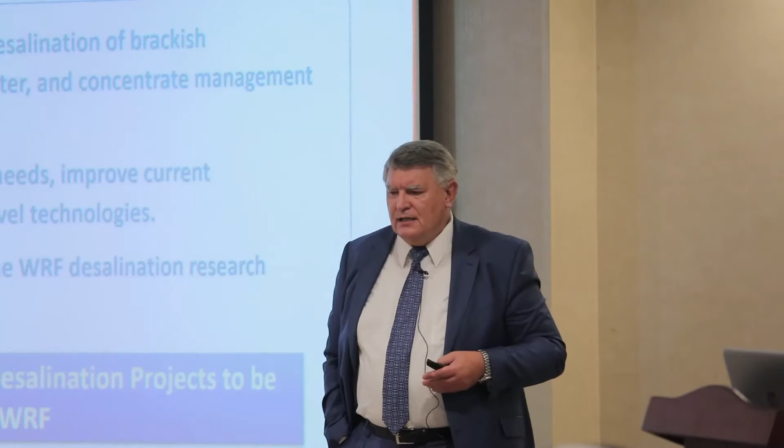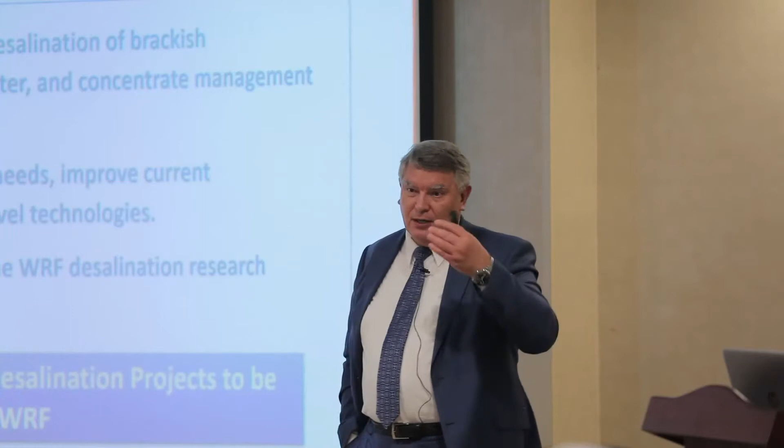What we're trying to do is identify timely and compelling research needs—what is needed by the industry to address those sources of water and produce them at lower, competitive pricing. At this point, the focus is research for the next 2 to 3 years. Today, the research community in the US is advancing topics in science very quickly, so every 3 years the focus sometimes changes. There are some common themes, but every 2 to 3 years it needs to be updated because new topics come up as research and science develop, and they have to be incorporated. Science in desalination is growing and changing fast, so every 2 to 3 years is a good time for updates.

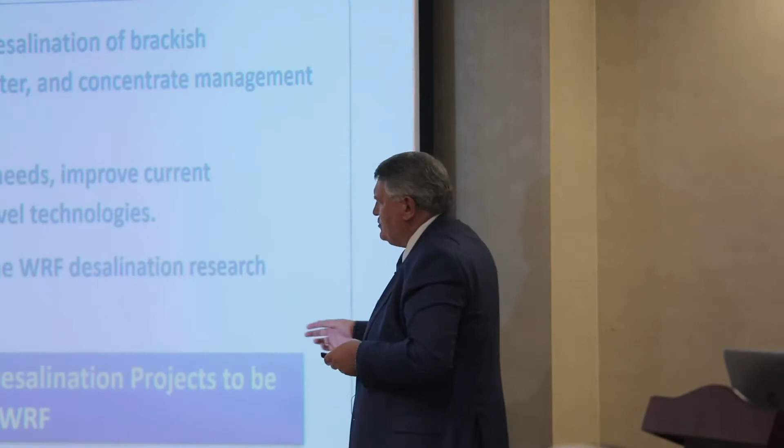So the purpose of the roadmap is to prioritize and identify projects that are of high value to the Water Research Foundation subscribers, to public utilities, to research institutes, and to private sectors. I'd like to present to you the process—how they developed it, and how they're currently developing it, since it's not done yet. Let me explain the key steps they took.

First, they created a steering committee to oversee the research needs, made up of experts in the desalination field—I can proudly say I'm one of the members. There are 5 members on that committee, and its purpose is to steer the direction of development of the roadmap.

One of the things we did, because most people on the research committee are very busy and don't have time to write lengthy roadmap documents, is retain a consultant through a procurement process to do much of the work associated with writing, preparing for workshops, and other activities. That consultant is an engineering consulting company in the US, selected through procurement. We prepared a request for proposal, submitted it to everyone interested, had 5 companies submit proposals, and based on their scope, proposal, and costs, we selected one of them. So one purpose of the steering committee is to make that selection.

So, having created the steering committee and procured a consultant, the very first thing the consultant had to develop is what we call the State of Desalination Science Report. This gives an overview of all key issues at present—both in science, but also in policy, permitting, and environmental impacts. We look at it very holistically. This report facilitates the next step, which is a workshop that identifies the actual key topics of research.

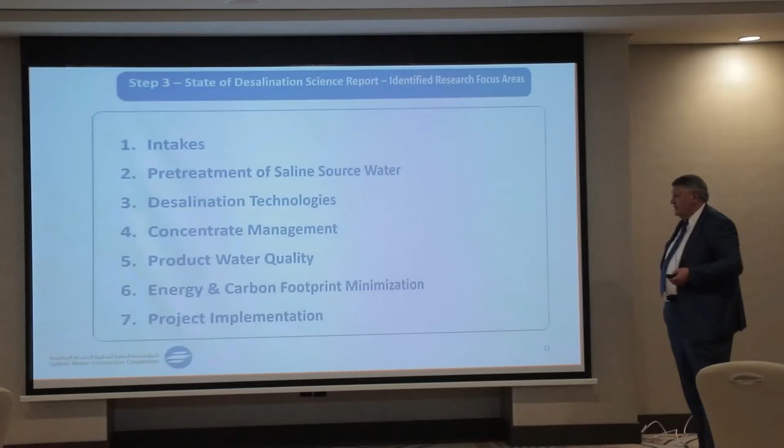So what are the issues associated with intakes in the US? In the US, we consider, and many of our regulations consider, intakes as damaging to the species that live in the water by two processes: impingement, which means pressing the species against the screens of our intakes so they die or get injured from that pressing, and entrainment, which is once marine organisms enter our water, they go into pretreatment and other facilities and basically get killed. Those types of losses by impingement and entrainment are considered significant in the States now.

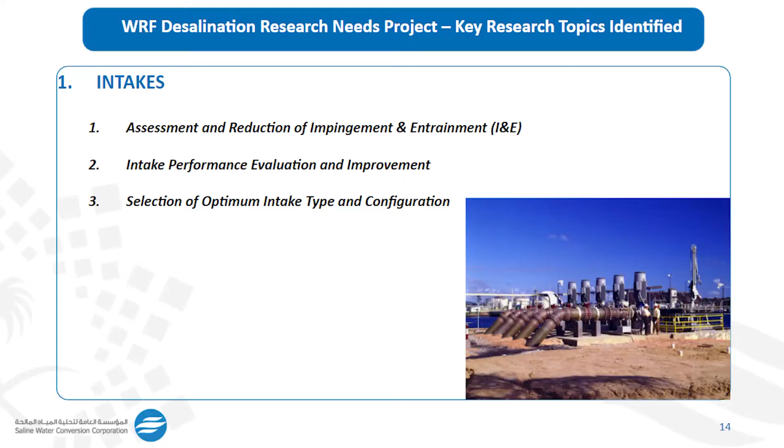It depends on where the intake is, and there are regulations to minimize or compensate for that. For example, the Carlsbad Desalination Project, where I was chief technology officer, was required - because of the amount of marine organisms taken from the water - to create a separate lagoon that produces exactly the same biomass of marine organisms that would be taken by the intake. Very expensive to do; it added about 20% to the cost of the project, but that's how the US looks at it. So anything that minimizes impingement and entrainment significantly reduces the cost of the project in the States. That's why it's so important.

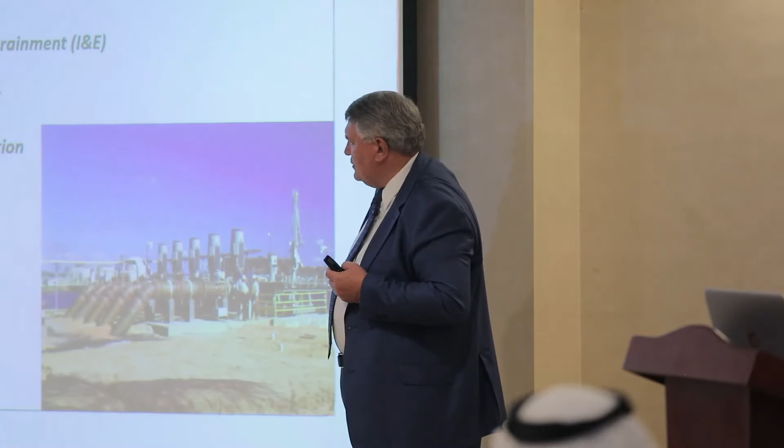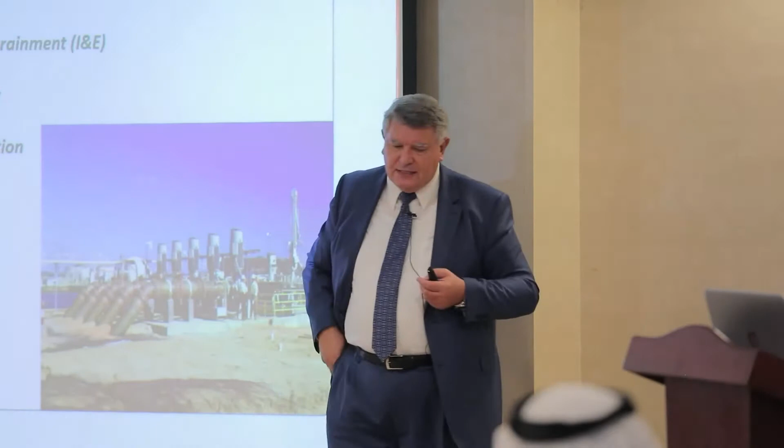Next is intake performance evaluation and improvement, which is also related to impact on the environment. And then selection of optimum intake type and configuration. In the States, as I've seen in a number of studies done in Saudi Arabia, there is a big discussion about whether to go with open intakes or subsurface intakes of various kinds, and which one is better for what conditions. Subsurface intakes ultimately minimize environmental impacts because they don't impinge and entrain marine organisms. So selecting the type of intake for specific conditions is one of the key topics people are interested in in the States.

The other key topic is pretreatment - fundamental understanding of foulants and fouling mechanisms. Despite the fact we've studied fouling for many years, and many of you have probably been involved in studying that.

Dr. Al-Amoudi has worked on that for many of his research activities. Fouling and understanding fouling is of critical importance.

Now the thinking is changing. It used to be that we add chlorine and eventually win the fight against bugs by killing them. One thing we've learned over the years is you can't really win that game. Marine organisms are very resilient to chlorination and many other methods of destruction. Most of the biofouling organisms are called alpha proteobacteria. They were the very first living creatures on this earth, exposed to extreme conditions like ultraviolet irradiation that don't exist today, but they adapted. So they're very difficult to destroy.

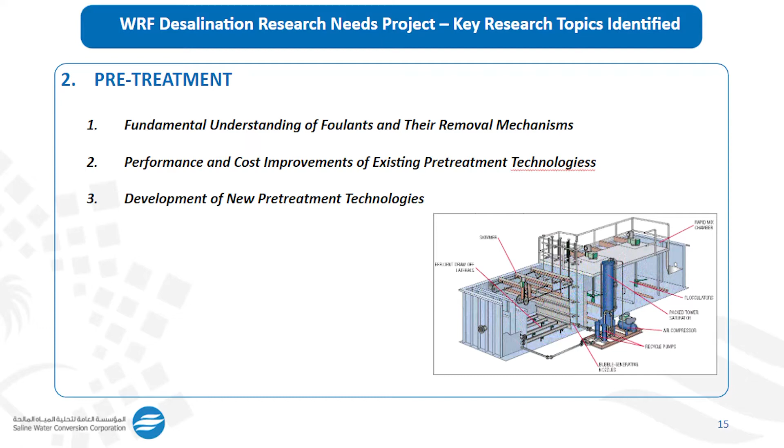So what we're doing now is saying, forget about killing them. Let's figure out how to make them work for us, by removing the organics upstream using bioreactors, like activated sludge, or by shutting down their fat gene. There was interesting research from one of the team leaders I'll talk about, who figured out there's a particular gene in bacteria that creates the sticky substances around them, and there's a way genetically, by certain chemicals, to stop that gene from activating. So now we're looking at understanding how bacteria work, not necessarily trying to kill them, but working around to suppress their ability to stick to the membranes.

Number 2 is performance and cost improvements of existing pretreatment technologies. There are many technologies that do not work, like dissolved air flotation, which has been built in many plants. None of the DAF systems ever worked well. I actually did a study for a client in the United Arab Emirates to check how they work and how much they remove. They're a complete failure, but we keep on building them, and there are very good reasons for that. So there's a lot of research now focused on what's wrong with DAFs for seawater.

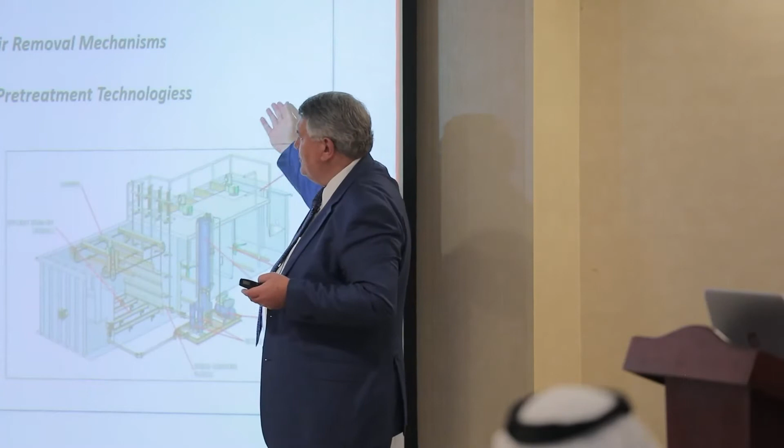There's a lot I could talk about for hours, but it's a very interesting topic. Now we're trying to learn how to improve dissolved air flotation to make it beneficial, or do we really need it, and what are the options? There are various solutions implemented worldwide that actually remove DAFs entirely - just forget about DAF. This used to be good thinking 10 years ago, but it's old thinking now.

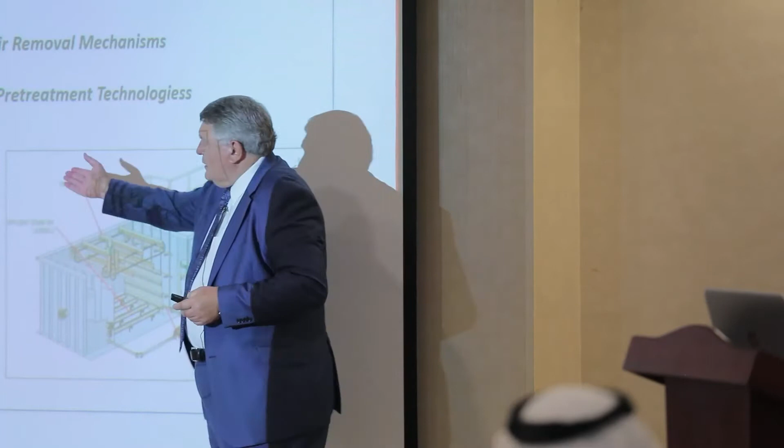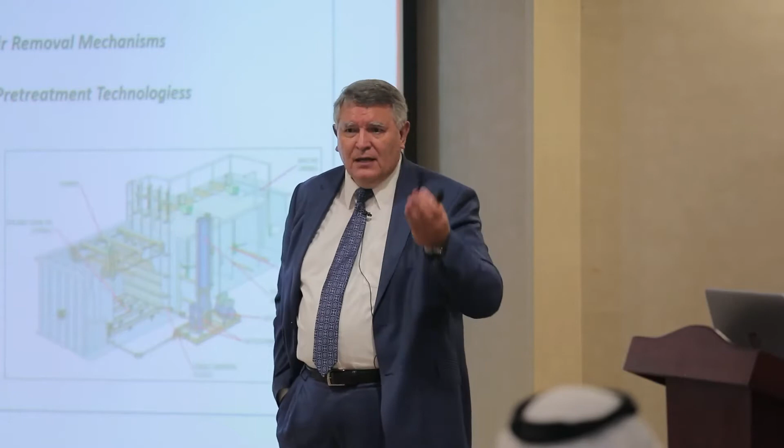Number 3 is development of new pretreatment technologies - ceramic membranes and other methods. One researcher looks at pretreatment and says, we have all this bacteria and organics, why are we trying to remove them? Just kill everybody. The approach is ozonation, which burns bacteria and organics, so there's nothing left to pretreat - nothing that causes any issue because it's all burned through ozonation. Those are the new methods of thinking, not conventional filtration, but more intensified processes the industry is now looking at.

Of course, desalination itself is very critical. We tried to build bigger desalination membranes - 16-inch, 18-inch, 19-inch elements in the States. We failed for a number of reasons, which I could talk about for another 2 hours, but ultimately we concluded this is not the right path - building bigger elements that produce about the same amount of water per square meter. The right direction is to increase the productivity of the membranes themselves, the surface layer. Currently surface layers are created through a random chemical reaction. If we could streamline it and turn the surface of the membranes to look like a honeycomb, we could increase productivity of the same size by about 20 times. That's where the focus is now - new materials, not new big membranes as we used to think in the past.

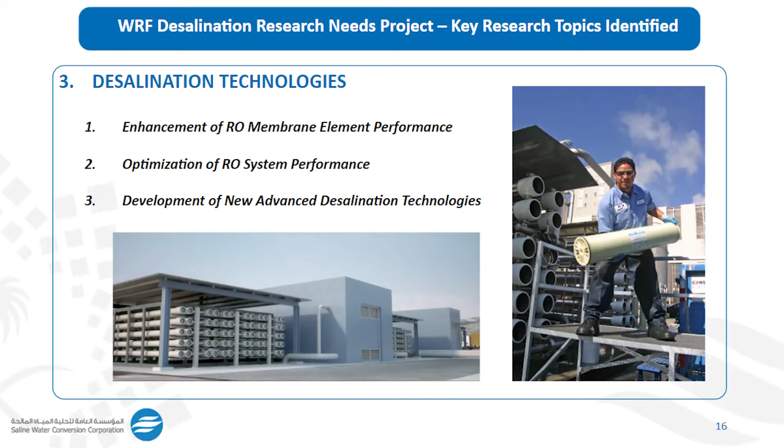So this is about enhancement of RO membrane element performance - that's where the focus is. Also optimization of RO system performance - how can we squeeze more water from the RO system? We know today most of our desal plants are designed around 35 to 45% recovery. The future is in recoveries over 60%, 60, 75 and on. So that's how we develop those systems.

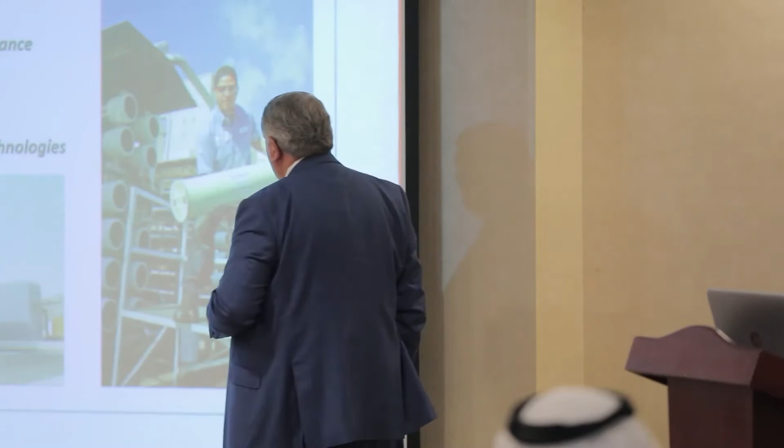And then number 3 is development of advanced desalination technologies that are non-reverse osmosis, like aquaporins and other processes that have been attempted but not yet brought into success. It doesn't mean they don't necessarily work - there's no easy solution, but nature often offers very elegant solutions, like mangrove desalination separation or aquaporin separation, that could be a completely different way of solving the same problem.

Concentrate management is now very, very important. For us to grow desalination business, we have to be able to get rid of the concentrate and not only dispose of it, but also turn it into a valuable product.

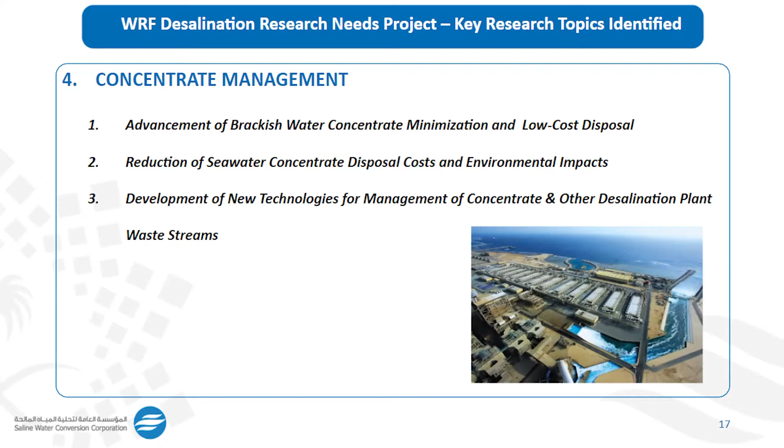So we have focused on advancing brackish water concentrate minimization and low-cost disposal. Currently what we do in inland areas, we just dump it in very deep confined aquifers where the brine cannot exit. Or if the project is relatively small in volume, we use evaporation ponds. Both of those methods are very expensive, and we have not considered those elegant solutions.

So now we're looking at zero liquid discharge approaches, which could minimize significantly the volume of brine, reducing seawater concentrate disposal costs and environmental impacts. And then development of technologies for management of concentrate and other waste streams. Why are those important? For the same reason I mentioned previously: how do we turn brine from waste into a valuable product? Technologies are evolving to the point where we could actually do that nowadays.

Product water quality is also a very important issue in the US. One thing we realize is product water quality has direct impact on human health. And that's why what we're trying to understand is, for example, desalinated water has less minerals than other sources of water. How is that impacting human health? We find that there are actually negative impacts. We've seen that actually happening here.

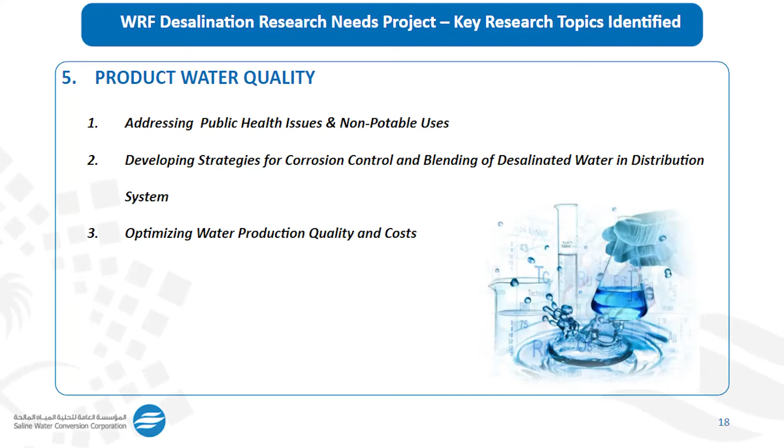I participated 2 years ago in a research project in Qatar that actually found, medical research found, a statistical correlation between cancer and low salinity desalinated water. And that is going to continue for 5 years, with hopefully next year's research. It's actually led by the Queen of Qatar because she considered that a very important issue. So those types of issues we start finding as well in the States. So desalinated water is not necessarily healthy water if it's not nutrient balanced.

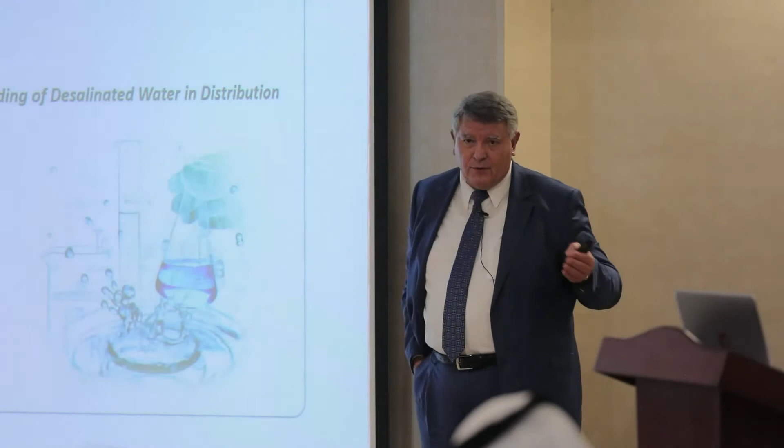Developing strategies for corrosion control and blending of desalinated water with other systems. We find that when we start blending desalinated water with other sources like river, lake water, and other water, we start seeing chemistry that we haven't seen before. And we're learning to understand what happens when we mix it.

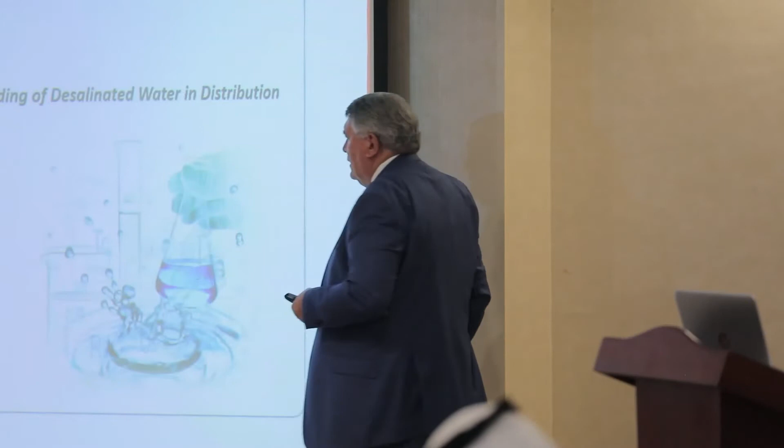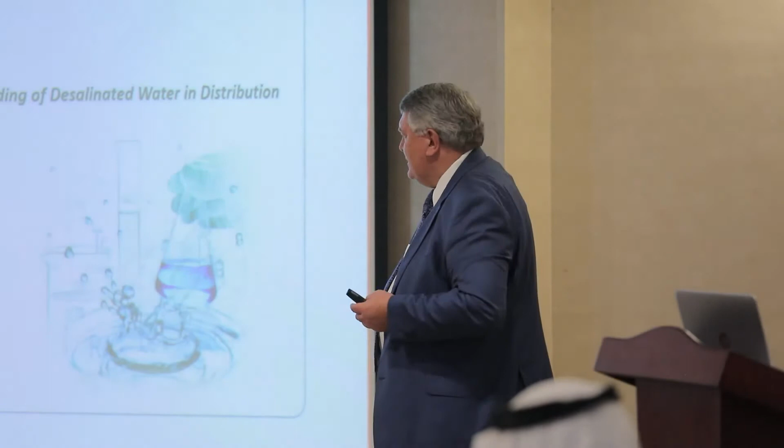And then optimizing water quality and costs. We can obviously produce what we call in the States designer water. We could add minerals of any type to make it look like Perrier, Pellegrino, anything, you name it. But that costs a lot. So where do we find the optimum between remineralization and quality that is at a reasonable price? And carbon footprint is certainly very important now.

Development of RO energy reduction technologies, from energy recovery, to switching some of the components of the desalination plant to work on solar panels. Nowadays, most of the new designs have all roofs of the desalination buildings covered with solar panels. Not that that makes a huge difference, just to tell you, based on our experience, if you cover all the roofs of all the desalination buildings, you'll get probably about 1% of the demand of the plant. So it's not huge, but it works.

Second, advancement of energy recovery technologies - we're trying to squeeze more energy out of the brine. And third, development of new low-energy desalination technologies, looking at how do we desalinate water without using reverse osmosis, because that is a very expensive process. Aquaporin is an excellent example of that, for which the discoverer of that process received a Nobel Prize, where he found that besides reverse osmosis, there is enzymatic transfer of water through membrane cells. And that enzymatic transfer is a very low energy transfer, 100 times lower than osmosis. So how do we harvest that?

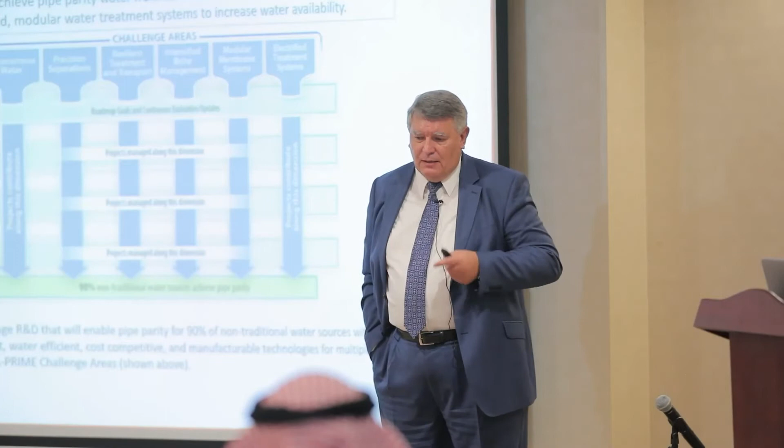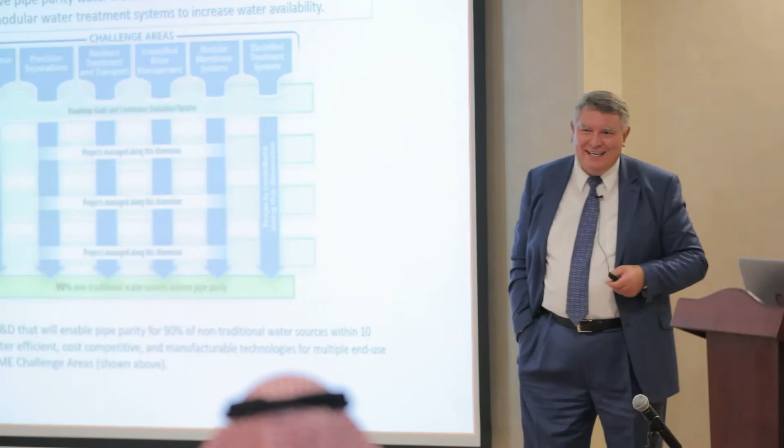We're already running a pilot - we made a joint venture with them. We're running a pilot in Norway of the plant, it's been running for 3 months, and it's coming to Jubail next March, so you'll be able to see it. Hopefully next time when we have a workshop, we'll take you out to be able to see it. So that type of resiliency is very important.

Intensified brine management - what that means is exactly what we discussed, turning brine from a waste into a valuable product. What do we do to do that, and do that inexpensively?

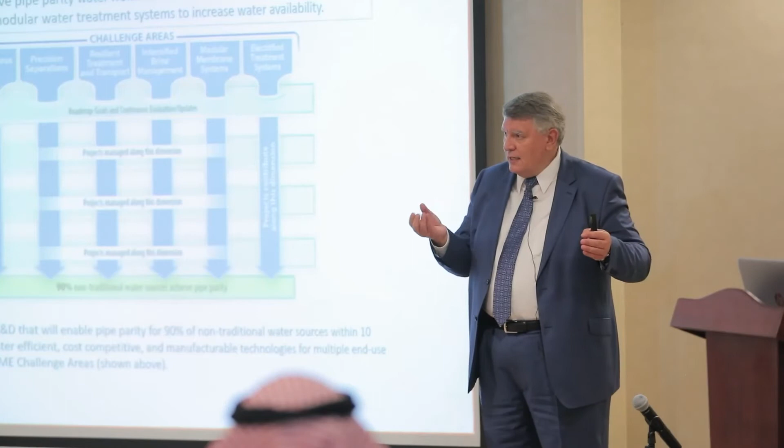Modular membrane systems - that's a very important new concept considered the future of desalination. The way US research institutions see desalination plants in the future is as two bags of chips, low pressure and high pressure chips coming to the desalination plant. Every component of the plant is made of plastic except for the motors, and every component is printed on site with 3D printers. So the vision for the future is to develop a desalination plant that's at least 80% plastic, all printed on site using 3D printers, differing only in chemistry between low pressure and high pressure piping and equipment.

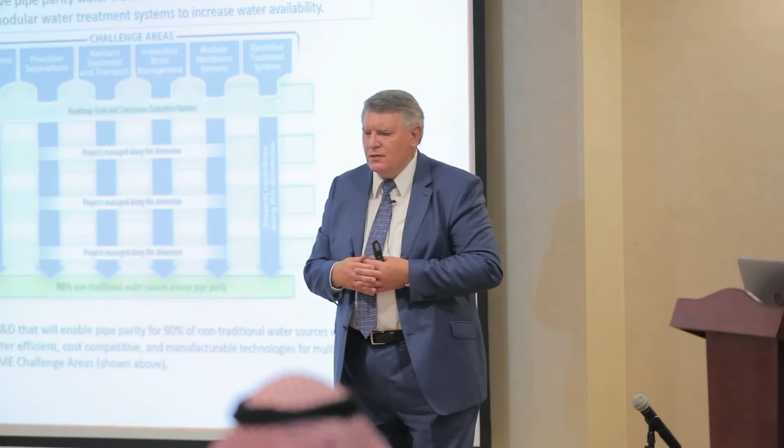And the way they see desalination in the future is responsive, and it will be morally obsolete - obsolete even in 10 years from now. So we have to look at how we can regenerate the plant quickly to match new technology.

The way they see it is we build most components from plastic, and once, let's say, this pump is morally obsolete 3 years later and there's a much better, more efficient pump, we take this pump and grind it into chips. If it was a high pressure pump, high pressure chips; low pressure pump, low pressure chips. Those chips are then used to print a new pump. So technically everything is 100% recyclable - that's the vision of the future.

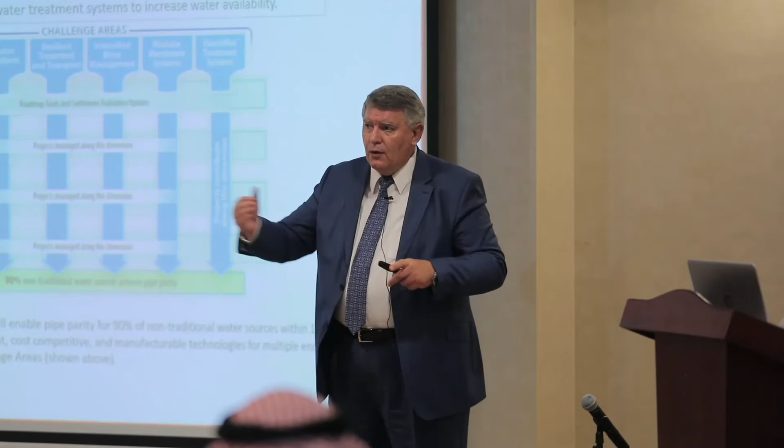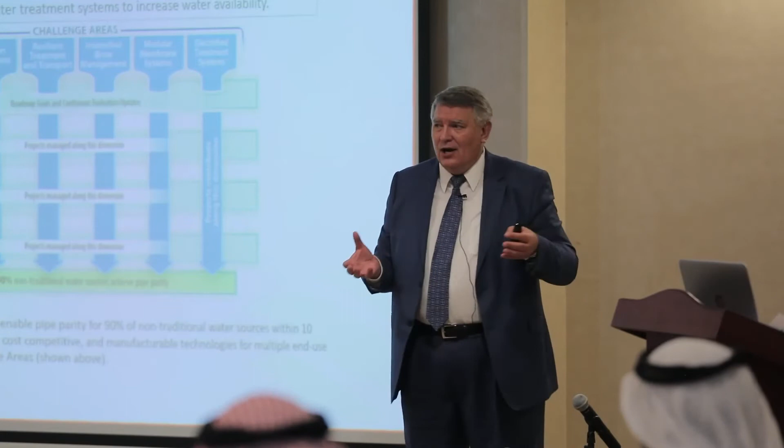All the components are recyclable, and what you get on site is no longer transportation with huge carbon footprints from moving pumps, equipment and heavy machinery - everything is printed on site through 3D printing. That's why this research is putting huge effort and funds into 3D printing every component we can think of for a desalination plant, because they believe in engaging the industry to rethink how to make everything modular enough to be easily 3D printed on site from plastic material, and then recycled, more importantly. Once it's morally obsolete 3 years later, you're a subscriber to, let's say, Torishima, which supplies you pumps.

You're a subscriber to them.

Three years later, when they have a new pump, they send you over the internet the programming for the 3D printing of your new model pump. So there is no pump being moved from Japan or any other location where it's produced. It's all printed on site. All they send you is the software to print the new part at the facility. That is the vision. That eliminates the huge carbon footprint of transportation of equipment.

It also eliminates a big issue. One of the items brought up in our roadmap here in Saudi is spare parts. Often we rely heavily on outside production, outside equipment, and getting spare parts sometimes takes 6 to 8 months. That's my experience with SWCC, for example. Everybody else is the same way.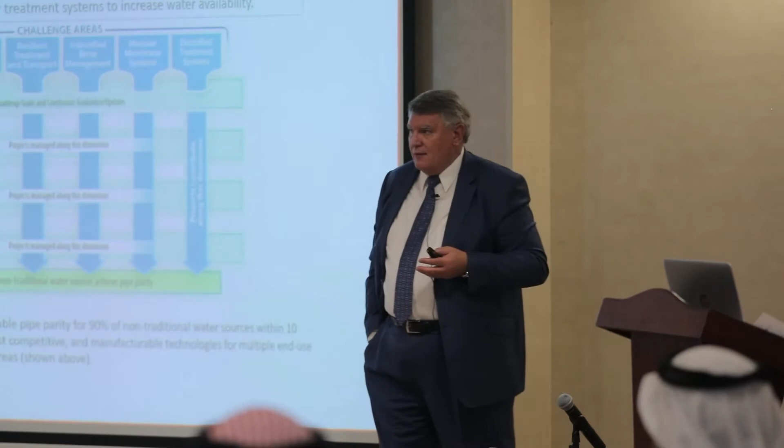Yeah, this is important. Asahi, for example, now they come up with pipelines from resin, organic resins. Now we have this in our piping plant. No more stainless steel for piping. No need for high alloys. Only organic resin now, succeeded in our piping plant when we tried.

Now this is a ship. This was a dream, but now it's a ship. What's the name? Asahi Kasei is the name of the Japanese company. Now for this team, what they are looking for is promising for us. Yeah, Asahi developed the high pressure piping, for example, and it's logical to assume it's possible.

As all of us familiar with reverse osmosis systems know, Asahi is a producer of vessels. They say, okay, we can make a vessel for high pressure. So what is a vessel? It's a pipe. So why can't we just make a pipe and replace all the steel with plastic? And that's what they're doing.

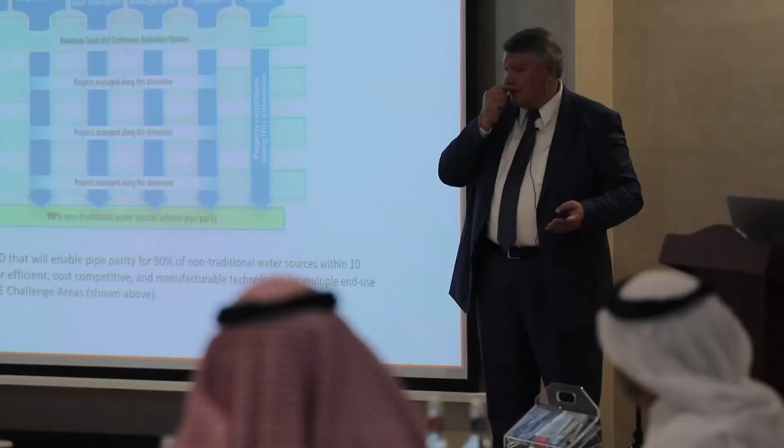The US is looking exactly the same way. Everything that is steel has to be replaced because ultimately steel is very difficult to recover and reuse, while plastic can be recovered and reused. And even if it breaks 3 or 5 years later, who cares? We'll just print another one. So 3D printing is at the core, and they call it advanced manufacturing.

The same thing applies for sensors. Sensors are no longer purchased from company A, B, or C. They're actually 3D printed on site as well. That's the other direction of thinking for these technologies. So modularity will be very critical, because we want to be able to change things easily, like Lego blocks. We've seen this in New Mexico, at Sandia Lab, where they have a 3D printer. They've developed sensors, and we're going to work with them on that.

These are 3D printed sensors, simple sensors, which can be installed either in the water or attached to the outside of a pipe, like a strap-on flow meter—they can strap it onto the pipe and take a reading. They don't require much, they're only $10, and they can be printed. So let's say 6 months later, rather than calibrating, you just print another one. That way there's no calibration, no expensive replacement—everything is done on site.

The other thing they developed, which is the new generation of thinking, is moving past fiber optics. Currently we use a central control room that gets information from all the sensors, which are usually physical metal sensors. We collect the information, process it, send it back, and use fiber optics. But they say fiber optics is stuff of the past—we shouldn't be looking at fiber optics anymore.

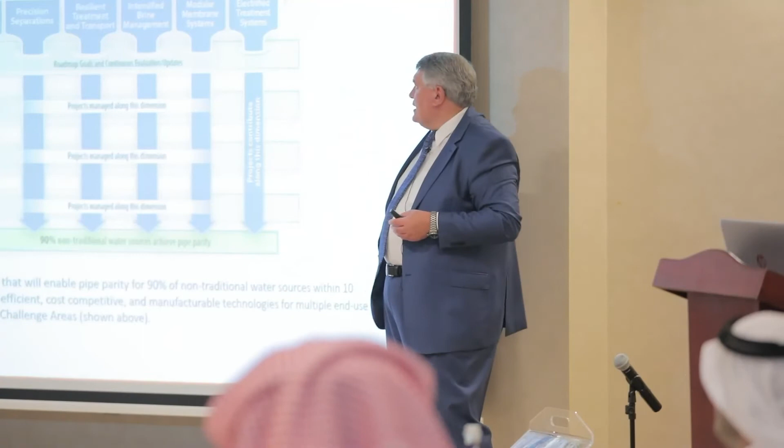The thinking here is they develop sensors that can be activated by a signal from the central control room, which sends the signal to activate the sensor to take a reading, and the same energy sent from the control room is enough to return that signal back to the control room. So there is no internet anymore—it's a remote sensing approach. This is the next generation of sensing they're working on, and they consider it part of the modularity and electrification of the system.

How do we eliminate the need for expensive equipment that requires calibration and heavy maintenance? The answer is: let's make it cheap and just replace it. Why do we even have to calibrate it? We just print another one. And they showed us sensors they developed, and 3D printed one in front of us using a simple printer.

They printed a $100 bill as well, and it looked like a real one. And they said, well, you run out of funding? Here it is, it can print anything. But the point is, this sensor is $10.

We're not talking about this 3D printer, we're not talking about expensive equipment. So all this is possible and already done in other industries.

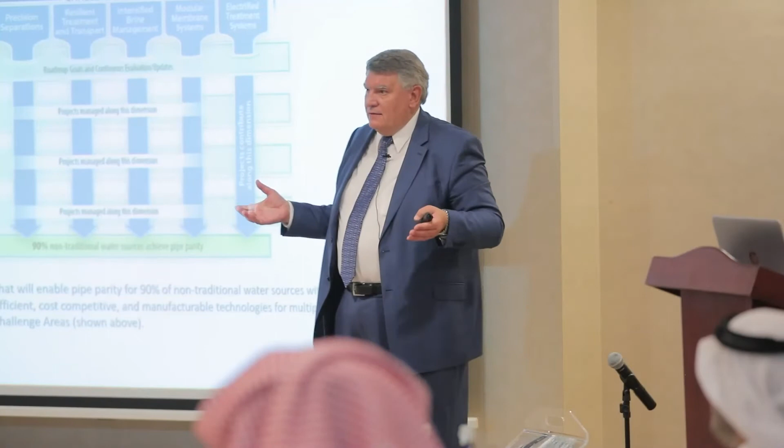When we went to visit Oak Ridge National Lab, you wouldn't believe, Tesla, who you know from the electrical cars, has retained Oak Ridge to develop a 3D printer for their cars. They're 3D printed except for some components, 90% of the Tesla cars are 3D printed. That's how everybody looks at printing in the future. You see Boeing with their new engines, huge complex engines, all 3D printed. So the industry now is retaining those labs to develop 3D printing.

The other beauty of it is they not only can 3D print the component. Let's say we need a spare part, and that spare part will take 6 to 8 weeks normally. It will take about 2 to 3 hours to 3D print. And more importantly, they can figure out exactly what is wearing off and provide a different substance, often a composite material, which could be a mix of plastics and metal, to replace that component. So when they 3D print, they can print it 100% in metal as it was, but they can also offer 3D printing in different composite material that can actually make it more durable.

We've been talking with them. Actually, one of the projects we've been focusing on with Dr. Alamoudi is for them to help us, and they're coming early next year, to identify which components in SWCC plants have the longest lead time. Sometimes we get 6 to 8 months to get a component. Well, we could print it in a couple of hours instead, and they said, sure.

And the high pressure pumps, valves, any component you could think of. The beauty of it is the way it works: it electronically goes into the printer and it prints it, replicates it. So you need the scanner and the printer. That now exists as technology, and we're not talking only about printing a small component. We can print the entire car. The 3D printers for cars are about the size of this room. So the point is, this technology already exists and we have to benefit from it, because that eliminates the spare part issue. We could print anything we want.

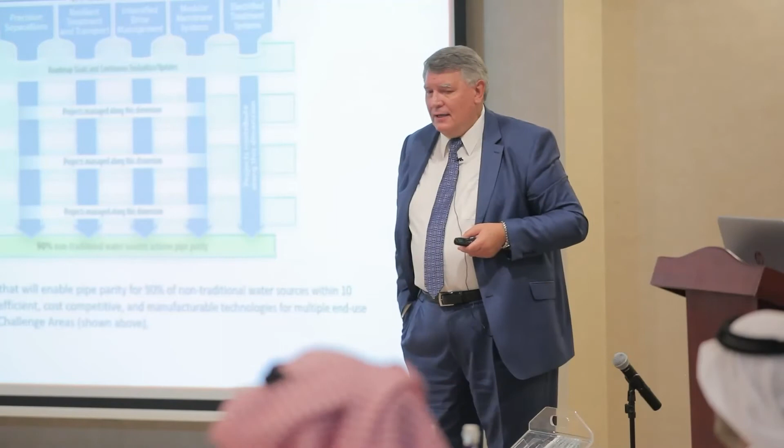Yeah. Yeah, you could print every spare part. Yeah, and that's the vision of the future.

At this point, we will start with one 3D printer, which will be located in our facility. Then, once we prove everything and develop it to a point where everybody's comfortable and we train staff, we'll move one to every treatment plant. So you could print anything you need, you don't have to wait for so many months.

I don't know, maybe about 15.

Okay, and I'm going to go a little bit faster over what's left. Basically, it explains who are the leaders in it, what is the funding available. The leader of the entire program is one of the National Labs, the Lawrence Berkeley Lab, located in California, in San Francisco. They do lead the entire program.

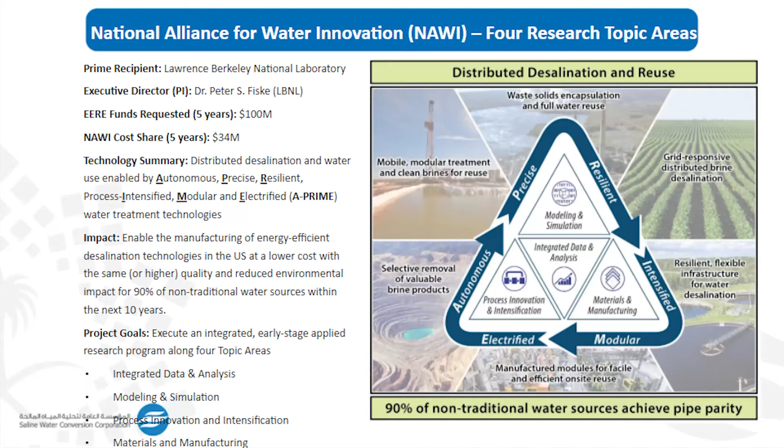And I wanted to talk a little bit more about how the topics are selected, and more importantly also, what are the criteria for project selection. How do you pick, because you have such a big area of projects you could do, what are your criteria to pick a project and to build and implement it?

The criteria are energy intensity, energy per cubic meter of water produced, levelized cost of water, basically we call it cost of water production, and water intensity. This corresponds to what we call recovery. In a desalination plant, as I mentioned, currently we take 100% of water and we recover 30, 35, 40%.

How much higher we get will be an important criterion. So if, for example, a technology can recover 75 or 80% of the water, it will be prioritized compared to a technology that is not as efficient, maybe producing the water at the same cost but with lower recovery. So recovery of the source product is very important.

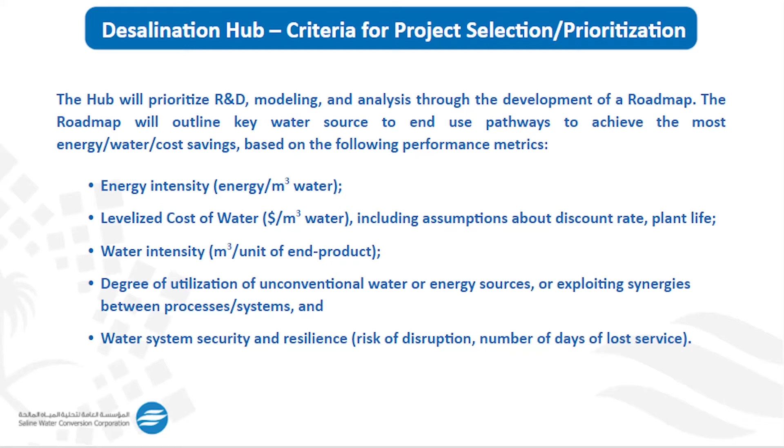Then degree of utilization of unconventional water or energy sources. What that means is a project will be given higher priority if it relies on renewable power. Therefore, renewable power gets a great focus. The more renewable power is used in the process you're proposing, the more likely it is that you will get funded to develop it.

And then water system security and resilience, risk of disruption, and number of days of lost service. As I mentioned, availability, which in the US currently is about 96-98%, as it is in Saudi Arabia for desal plants, based on what we've seen. We are now looking at shooting above 98%. KPI for SWCC is 98% and above, but the industry is now looking for 99% and above. So those are the criteria.

So in every project, when somebody proposes a project, they have to show several very important parameters. What is the typical, let's say, energy use or cost? Doesn't matter what parameter it is, you have to show this. What is typical? What is the state of the art? What is the best known cost, or if this is a cost, you're proposing a technology, you have to show what is the typical cost for that technology, what is the state of the art, the best technology available, what that technology can do. And then the practical minimum, which is how low can we go using existing knowledge and technology, and then the theoretical minimum.

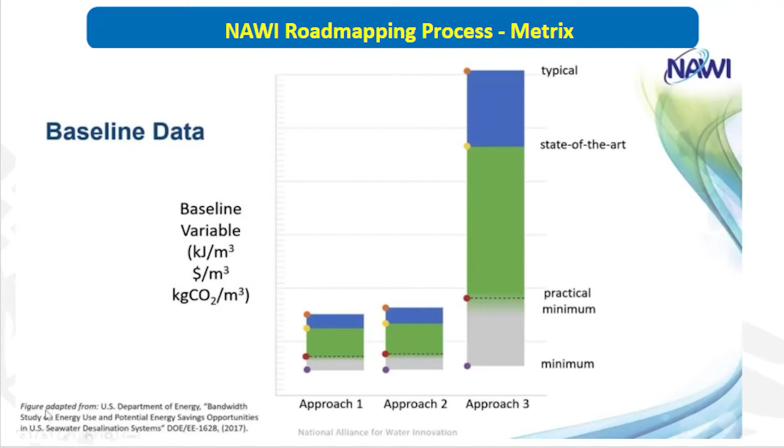Like if we take energy, for example. Currently we know that typical for our plants is 3.5 to 4.5 kilowatt hours. State of the art is about 3.2, 3.3 - this is the best plants in the world for seawater, about 3.2 to 3.4. Practical minimum, if we had the best energy recovery devices and pumps in the world, would be somewhere around 2 or less than 2 kilowatt hours. And then the theoretical minimum is 1.68.

So you have to show, when you propose your product, tell me what your numbers are for your product. Where are you? Are you state of the art? Are you close to the practical minimum? Are you shooting towards the theoretical minimum? That is a very important criterion for me to judge how valuable your work is when you submit your proposal.

So the key, they call it pipe parity metrics - that's a very weird term that only electrical guys can come up with. This is Department of Energy, they're not water people, but they're very strong politically, so they got the funding to go through their ministry rather than a different ministry, which is the Department of Interior and the Bureau of Reclamation. It used to be that all the federal money was going to the Bureau of Reclamation and Department of Interior. The Department of Energy is much stronger politically, so now they've refunneled all the money to go through them, and they use terms that we don't use.

Like, for example, pipe parity. What does pipe parity mean? What they decided is the goal - and I forgot to underline that, and I'd like to bring it back to your attention because it's very important - what is the goal of these technologies? The goal is within 10 years, the same as our Vision 2030, to reduce the cost of desalination down to 90% of the cost of conventional water treatment. So imagine, in 10 years, desalination will cost only 10% more than producing water from lakes and rivers or conventional water sources. That's the goal - in 10 years, a 90% reduction in cost. That is a dramatic improvement.

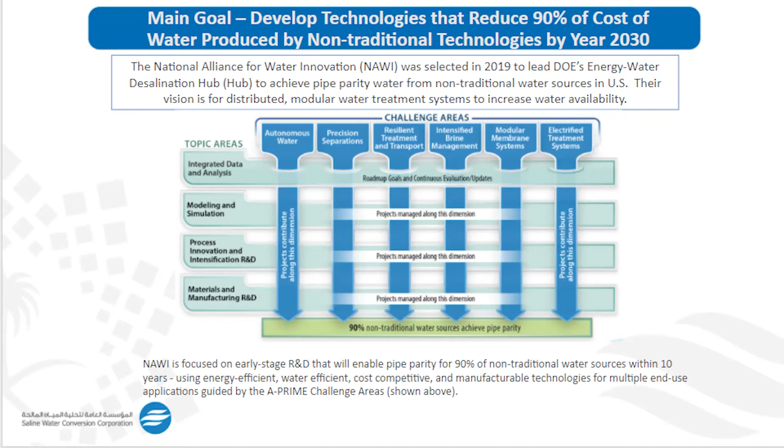Let's say river water source costs you 30 cents per cubic meter. In the States, it'll be 30 to 40 cents. You're allowed to be only within 10% of that. So if river water costs 40 cents, you have to bring desalination to not more than 10% more than that. 40 cents, 10% will be 4 cents. So your desal water cost should be 44 cents versus freshwater cost of 40.

That's basically them looking at 10% above what they call conventional water sources, like wells. Even conventional water sources in the US vary. Like, for example, if you...

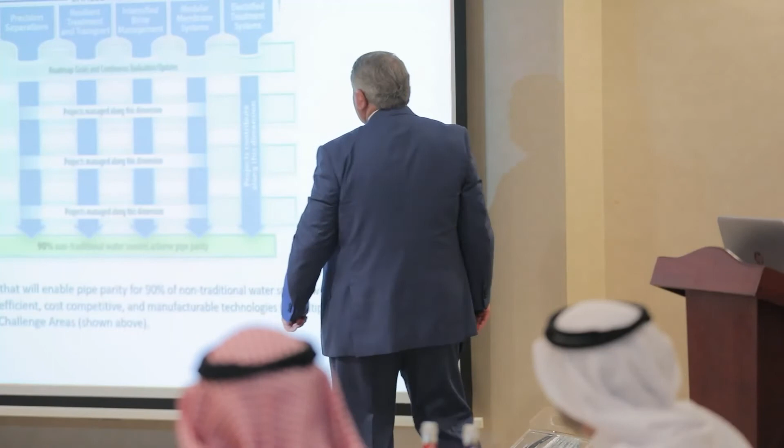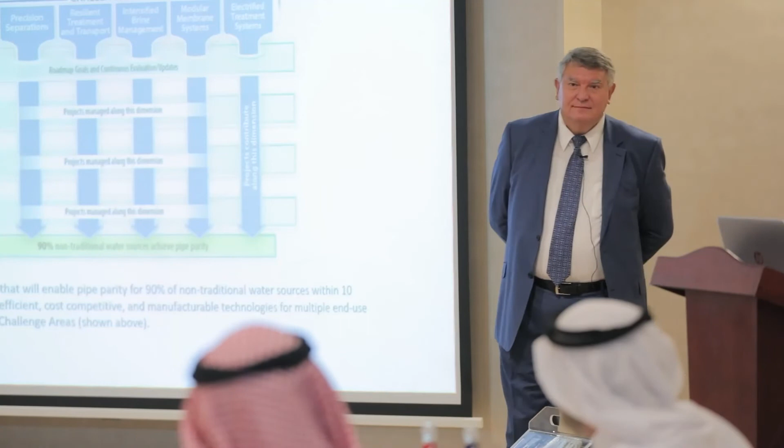I see your explanation, but when I read this - produced by non-traditional technology by year 2030 - that means in 10 years desalination water is above the conventional by 10%. But 10%, exactly, that's the goal. The goal is because currently the difference is significant - usually 2 to 3 times, even more, depending on the conventional source. So the goal is to bring the cost of desalinated water down to within 10% of conventional water source, whatever that cost is, because conventional water sources also differ in price.

The cheapest source will be a well. You build a well into a freshwater aquifer, that's as cheap as that, only the well cost. That will be about 30 cents in the US per cubic meter.

When discussing groundwater, like brackish water - the main issue for brackish water is the brine disposal. Yes, that's correct, this is the most difficult part, and that is exactly the case. They are currently dealing with this in the kingdom, and it is the same in the States. Actually, nowadays the cost of getting rid of the brine is higher than the cost of the treatment process. It is the same in the States.

Another issue for the kingdom, correct me if I'm mistaken, is that the radioactive materials ppm is higher than the rest of the world inside the kingdom. Yeah, absolutely, that's an issue you have to solve because some groundwaters could carry that. But the idea here is technologies that can allow you to deal with that. So whatever is the limiting technology - in this case brine disposal for inland brackish desal - how do you develop technologies that allow you to deal with that issue very cost effectively?

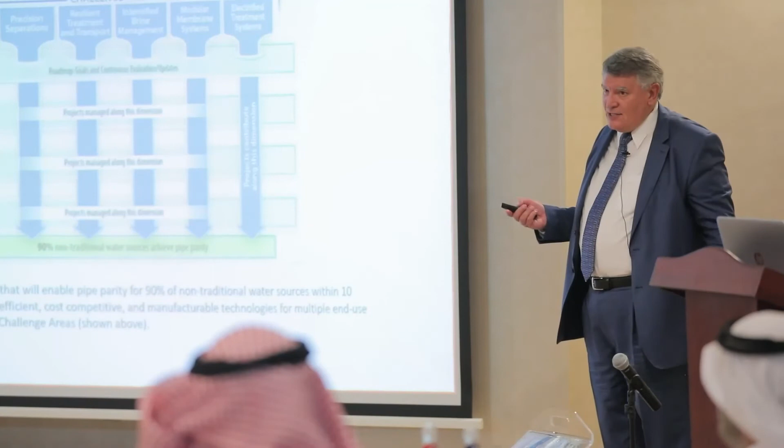There is no easy answer to any of those questions. It's basically the way they see it's possible: through integrated data analysis, modeling and simulation, process innovation and intensification - this is where the main focus is - and materials and manufacturing, new methods of manufacturing and new materials.

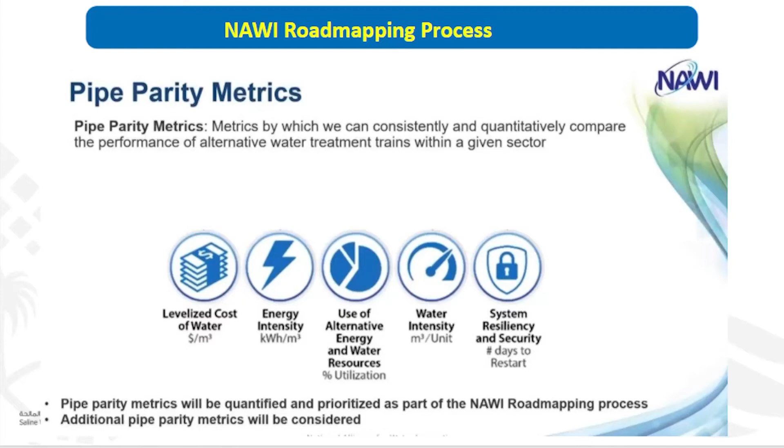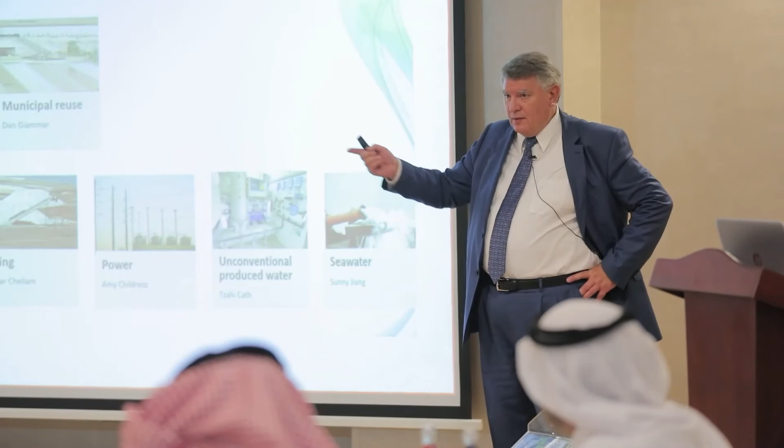Now, what is interesting in the roadmap is besides seawater, as you can see, is one of the water sources, we also have other waters. So basically this has to address solving problems with other non-conventional waters - industrial, brackish, municipal reuse, and others. So this roadmap encompasses, besides desalination, many other sources of water. Just wanted to point that out.

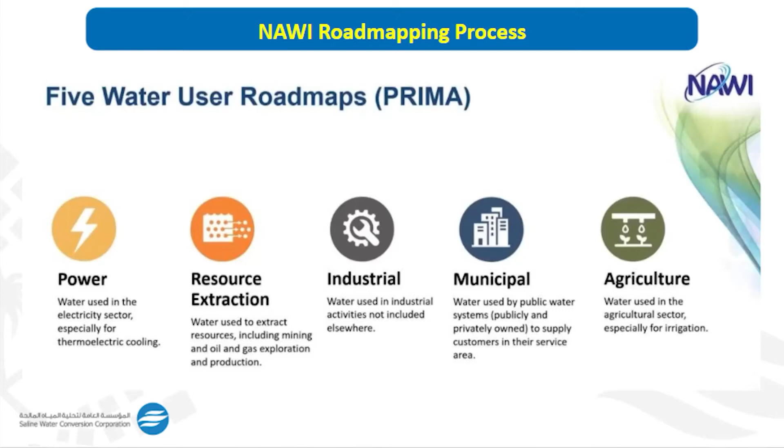And because of that, the roadmap is user-driven. Basically, the roadmap has to generate benefit to the key users. The key users identified are power industry, resource extraction - that's basically mining industry or extraction of benefits from brine - industry, municipal water treatment (that's municipal water supply), and then agriculture. So when we pick a project, we have to make sure the more of these we solve problems in, the better off the project is. So those are just criteria.

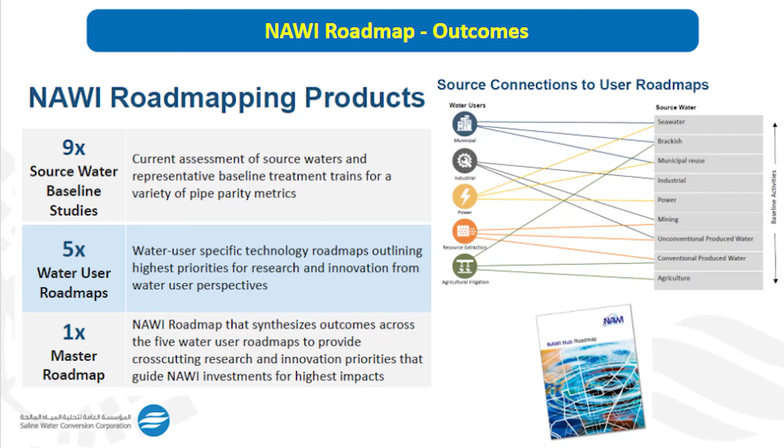So what the product of this process will be is actually 9 source water baseline studies. What that means is we want to define what brackish water means, what industrial water means, and what are the key constituents that are troublemakers for us. So those are the source water baseline studies. Then 5 user maps - those are the 5 water user maps of those 5 users. For every one of them, there will be a separate roadmap developed.

And then also there will be a master roadmap that collects all the inputs from all the other roadmaps. That's kind of their system. So how is the actual project developed in this case?

Every one of those water sectors that I mentioned, every one of those water sources has a person responsible to lead all projects in that source. Most of those guys are usually professors who are well-recognized in this field in the US. In our case, it's a lady professor from University of California, Irvine, who leads the seawater source. They are responsible to ultimately select the projects that are going to be implemented. They're called lead cartographers, again, a term that is very strange for desalination, but that's what they call that person.

That person taps into a source water roadmap team. I'm on the source water roadmap team for municipal desalination in that case. There's a group of usually 15 to 20 people on that team that are ultimately making the decision of which projects will be selected and where we should go.

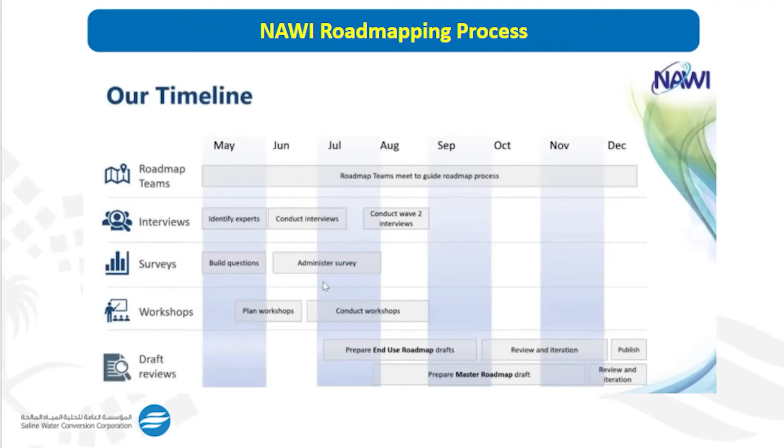This is the current outline of where we are with the roadmap. The roadmap teams were formed, we went through the interviews and surveys. In August we completed the surveys, we completed the workshops in September, and now we're developing the roadmap draft. I expect the draft to come to my review from the consultants by November, we'll review it, and then publish the roadmap by the end of the year. So there will be a desalination roadmap we could borrow ideas from, and by the end of this year, one for water reuse as well.

This is a fairly fast-moving process, because the ultimate goal is not just to create a roadmap, but to create direction for where we fund this $20 million every year to spend on new projects to develop. That's the ultimate goal of this exercise.

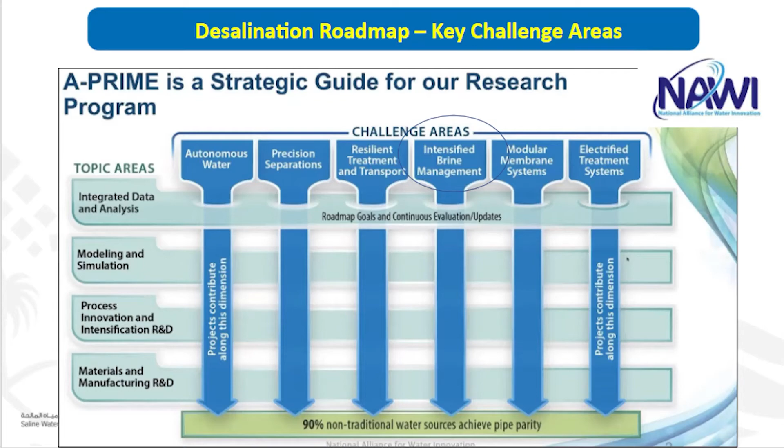One of the very important issues, and that's where they started - we started with requests for proposals for intensified brine management. It's considered so important that we decided we need about $8 million to dramatically improve the technologies for brine concentration and removal. The goal is, as you pointed out, this is the Achilles heel, the weakest spot in desalination, especially inland desal. So we have to solve it in a way that we could turn brine from waste into a benefit.

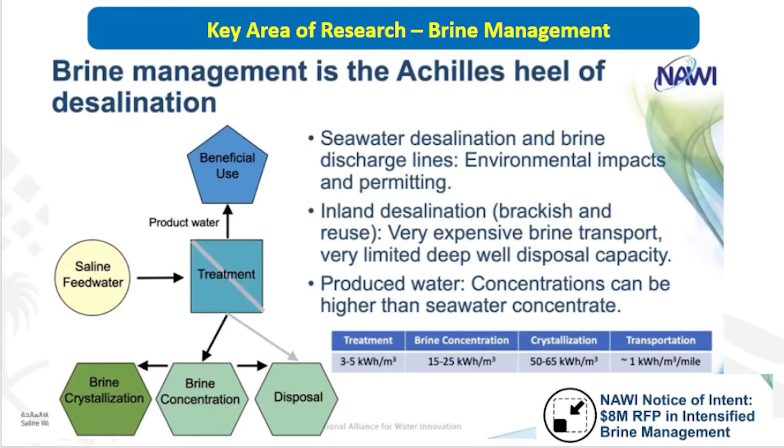The other question the proposal has to respond to is: can we derive value from brine? That's what we've been doing with DTRI—what can we turn from brine into a commercial product sold to commercial users, like magnesium or sodium chloride. Saudi Arabia is one of the leaders in the chlor-alkali industry, and that industry needs sodium chloride. We've been working with representatives of the chlor-alkali industry to meet their requirements by producing sodium chloride as a commercial product.

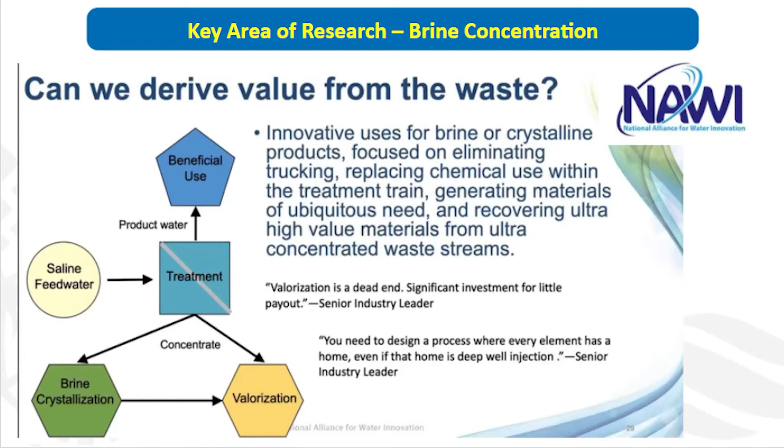What's very interesting is when you look at the economics: we're developing a 1 million dry ton per year plant for sodium chloride production for the chlor-alkali industry, SABIC and petrochemicals. The cost of sales of brine is about $40 million, while the cost of water is only $2 million. So water becomes a side product, a byproduct—the value is actually in the brine. As long as you can competitively extract value from brine that's multiple times higher than the cost of the water you produce, we're talking about changing the name from Saline Water Conversion Corporation into Brine Conversion Corporation, because that's where the money is.

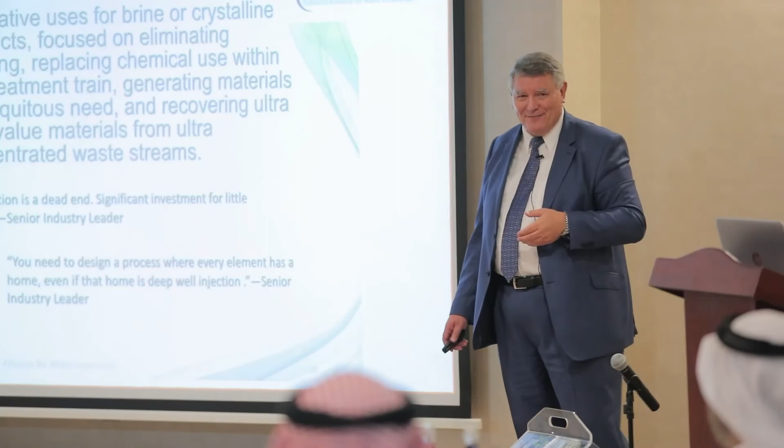Let's be realistic about it. As long as you develop the technologies, brine becomes a very attractive source of value.

Let us give an example. Selling water per cubic meter is about $1, whereas selling brine per cubic meter is about $12—12 times more. We can even go up to $15 and they will accept it. I just received a call via WhatsApp from a company—they agreed to purchase it, and they are now paying $85 per ton for the brine only.

And they request a special concentration for it, with high quality. That's what we are doing.

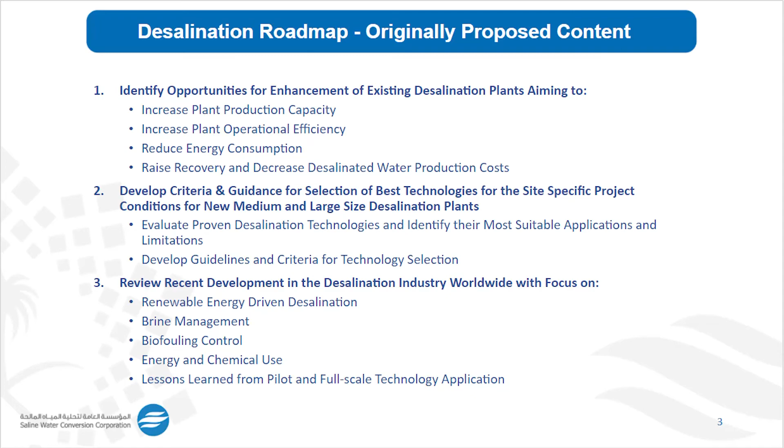All those items are great and important to look at the feasibility of emerging technologies. But at the end, we would like to redefine the objectives to include what you propose, and in addition, create specific projects, define specific research needs that can solve all the problems listed. So the first component is guidance and educational, and the second is: where do we go from here?

What is our roadmap to new projects and funding? The ultimate goal is to elevate Saudi Arabia to the status of world leader in disruptive science and technology. In the US, we started using this term - disruptive means your technology isn't just incremental addition to what's known. It will cause at least 25% or more improvement in energy, cost, or everything together, and be more efficient.

So that's how we define disruptive: 25% better than what's state of the art today. Saudi Arabia and many other countries have developed incremental research that benefits Saudi Arabia and other countries in general. What we're looking at is turning this into a roadmap for disruptive technologies that make a huge difference in the world, so others look at it and say, this is really smart.

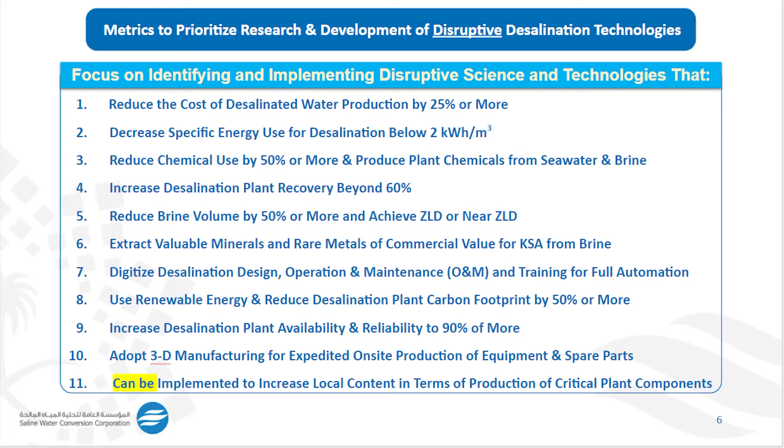In the States, we have the same approach with privatizers. They come in and give you these magical proposals using existing technology, and you say, if I add all the mortar, the concrete, the pipes, the piping, I can't even pay for half of that. What are you talking about? It's all playing with numbers.

That's why we said if you have a project, we have to know everything on the table. It has to be publicly known because we're a public utility - we're not hiding from the people. And if you can make it for 53 cents because you do magic with technology, sure, show us the magic. If you can magically design the system for this much money, it's yours.

But the reality is, I looked at some of those bids, like the first Rabigh 3 bid - 53 cents. I reviewed it. What they give you is the first year cost of water. When you look at the 25-year project, which is what's being awarded to the privatizer, and take the average, the 25-year cost is $1.28. But nobody tells you that number - and you wonder why, because that's the real number. It's not the 53 cents.

We need to develop a methodology that shows the real cost of water, because otherwise this PPP is being sold to you as a magic panacea, and it's not. Look at us - we're the biggest capitalists in the world, and we have the most publicly owned utilities in the world. 96% of our utilities are publicly owned. If it was a good thing, being the biggest capitalists in the world, do you think we wouldn't do it? No, we wouldn't.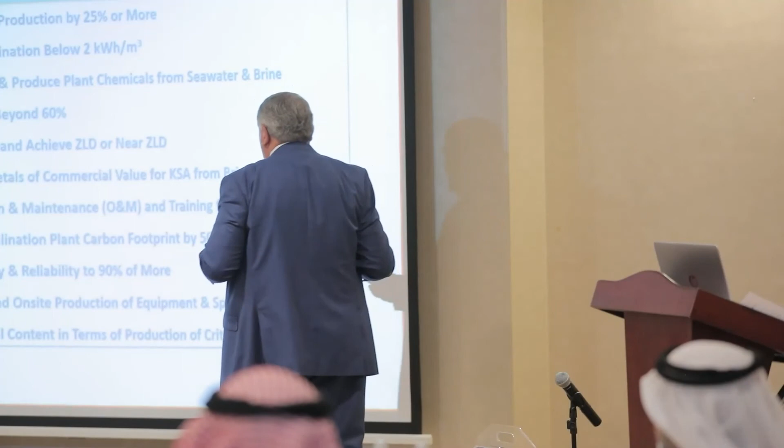Also, one thing we have to recognize is the private sector has a lot of benefits in terms of being efficient in operations. That is one big difference. They're very efficient in operating plants. They have ways of cutting down various limitations that we have in public procurement, and they take advantage of every one of them. They take advantage of the free market, and they certainly are efficient. We have to recognize that.

Those efficiencies we could learn and use. And if there's no ability for us to do it today, it's because we have regulations that limit us, and they don't have them. That's the only difference. But we develop those regulations, not the private sector. We can remove them if we want to be competitive. We just need to recognize the differences.

That's why I recommended this. One of the things to do, and you'll see later on, is benchmarking. Let's benchmark against the private sector, see where they're really different, and focus on those differences to see if we can do it. That's the reality of life.

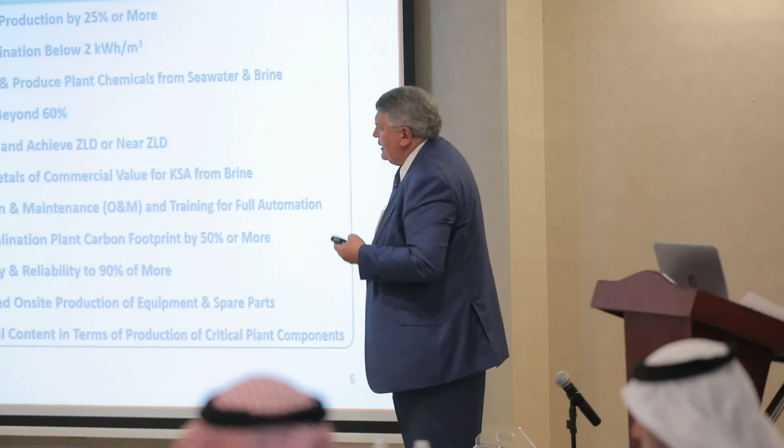All right, so let's continue on. One of the issues is the ZLD. The other is to extract valuable minerals, which, as I mentioned, will be helpful.

Digitize desalination design, operation, and maintenance for full automation. I think full automation should be our goal as well.

Use renewable energy and reduce desalination carbon footprint by at least 50%. Increase desalination plant availability and reliability to 90% or more. In our case, the goal is to really get to at least 98 or 99%.

Adopt 3D manufacturing for existing onsite production of equipment and spare parts. This is what I mentioned previously. I think this will be a very important direction for us to go, to address the spare part issue and, in general, fit to the future, where everything will be modularized and 3D printed. We have to be ready for the future.

Can we implement measures to increase local content in terms of production of critical plant components? What this says is, okay, I have this technology - can we make this, whatever it is, technology, membrane, component, pump, energy recovery - can we make it here? To me, that's going to be a very important parameter in saying yes, this is a good project, because we're not only inventing it, but we could actually produce it in Saudi Arabia.

So local content is certainly one of the key goals in this country. So what is it that I would propose as a process, which I think fits the original documentation that you've seen being distributed?

One is to establish a steering committee to move along with the process. Procure a consultant - I would recommend that because of the writing and organization involved. And as I mentioned, we're talking about 35,000, maybe 40,000, something like that. Probably won't be more than that.

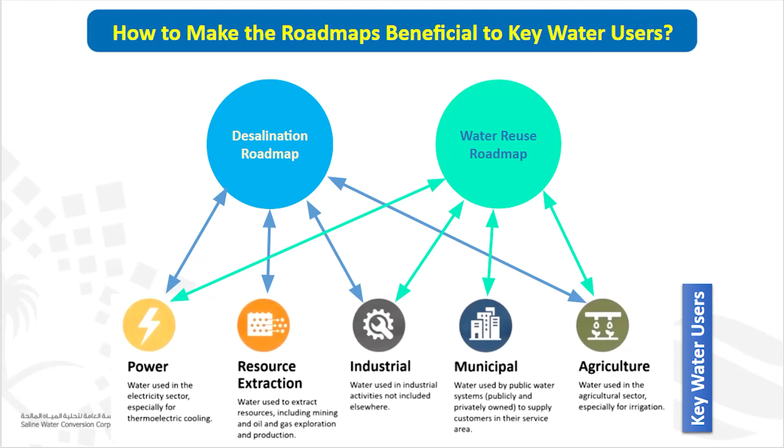But outside of that, the methods and technologies used in desalination in the US have evolved specifically into what we call fit-for-purpose waters, which means waters that are specifically reused for agriculture, and agriculture of crops that you actually have hands-on contact with, versus others like cotton where you don't have consumption of the product, or also for cooling purposes, different water qualities, different treatments.

The same is true for direct and indirect potable reuse. In the US, that's becoming a very important topic. It's not here yet, but it will come. And then the latest thing we're doing in water reuse is looking at technology where we have joint desalination and reuse for various benefits, would that be salinity gradient or others.

So that's basically my suggestion, or this is a draft, food for thought. It doesn't mean that's what we would accept, but it's something for us to discuss and see, is that fitting what you think our needs would be, or should we do something different?